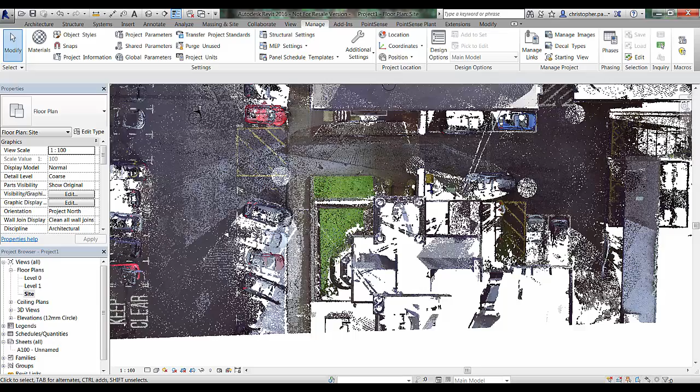The first thing I'm going to do now is find an area of interest. In this instance, in the 3D model here, we can see we've got this set of chimneys, which we'll probably have to model as a unique family, and that will save modeling time. So I'm going to go to the site level, zoom in on the area, and create a section directly next to the area I want to model.

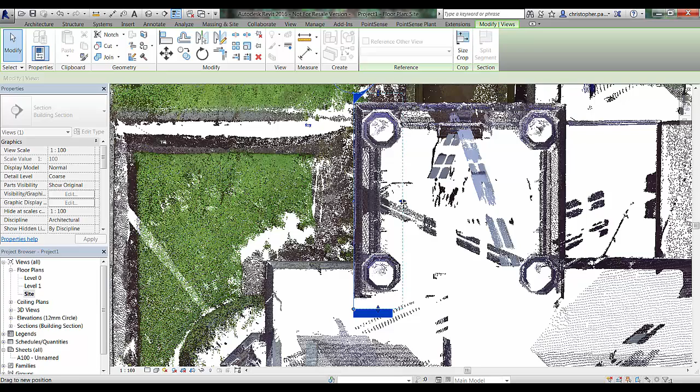I'm just going to change the extent of that section view to limit it, and open that up as an orthographic flat image. We can change the extent of the clipping area, drag these down, and zoom in to see what we have.

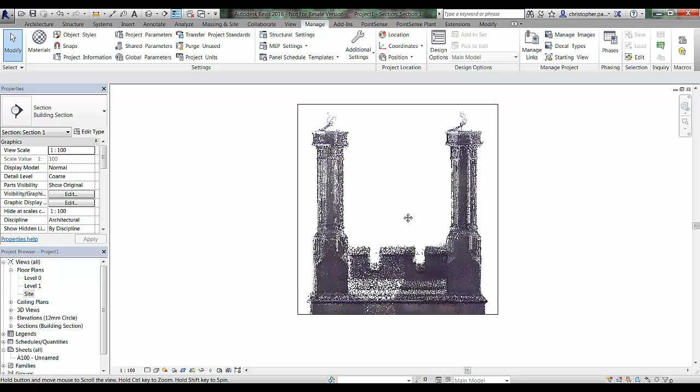Before I do anything, I'm going to go to the PointSense toolbar and go to my settings to have a look at what I've got predefined for the orthographic image. For the intensity factor here, I've got a setting of 1, and I'm going to change that to about 1000 and apply that, OK.

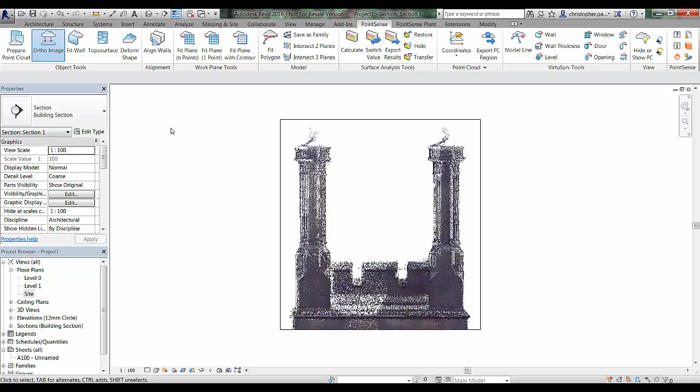The next step is to go into the Ortho image tool. You can see that's updated the X-ray intensity factor to 1000. Now we have to set a pixel size for our Ortho image - the predefined is 1, I'm going to put that at 2. We can then choose between colour filling mode or X-ray mode, but I'm just going to run this colour filling mode first and press start.

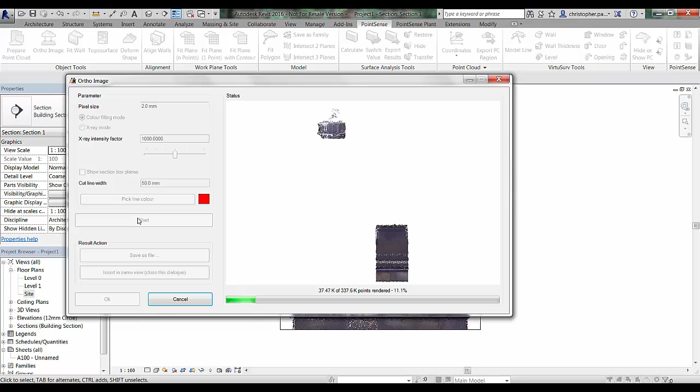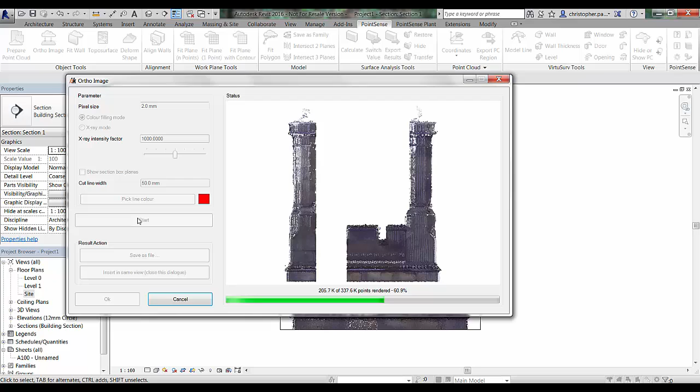First of all, you can see we are generating a raster image based on the extent of that section that we created, and this will take a little bit of time. Once we've done that we can choose whether or not to save this out as a file or insert it back into the specific section view. This will only work with section views or plan views.

If you use a 3D view, you can only save this out as a file. So once that's finished, I'm going to click on Insert in Same View, close this dialog.

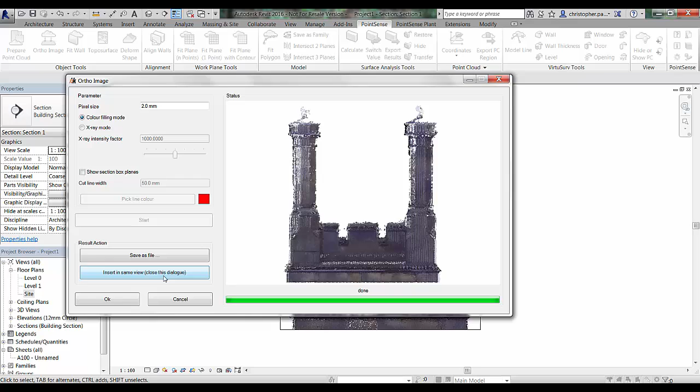That's just going to load that raster image into the current view. If I hide off the point cloud, you can see there's a tiled raster image being created in that area. And if we zoom in on that, you can see it's filled the gaps between the point spacings to create a flat image.

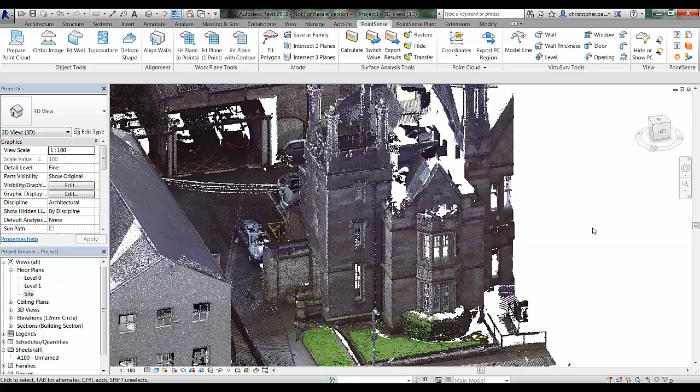If I orientate to section 1 in the 3D view, we can open up the same section in 3D, and run this Ortho image tool again. This time I'm going to use the X-ray mode. I already changed the X-ray intensity factor to 1000, and I'm just going to press start on this.

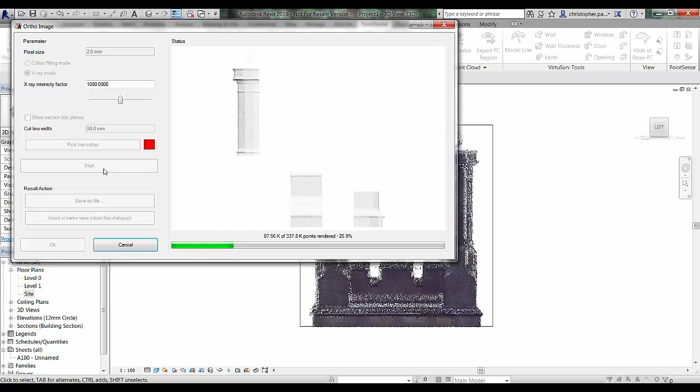You can see now it's gradually generating this grayscale image, and if I drag the intensity factor left and right, it slightly changes the visibility or the density of the actual image itself.

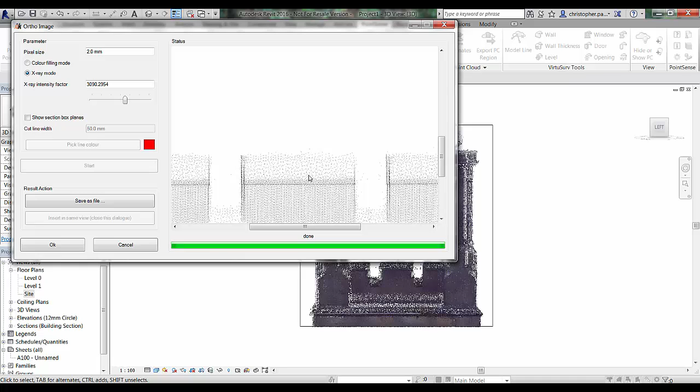So you can see that there now. We can only save this out as a file now because we're in 3D mode. So I will save this out, and we can show section boxes if we want to and change the colour, show the extent of that section box in black lines if we wanted to do that, and save that out as a file.

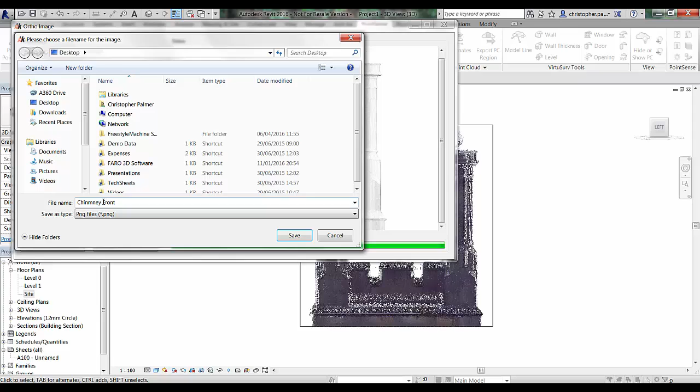I'm going to save this out as a PNG file. This will also save out an XML file, a scale file, which we will use to bring into the family template. I'm just going to click OK here.

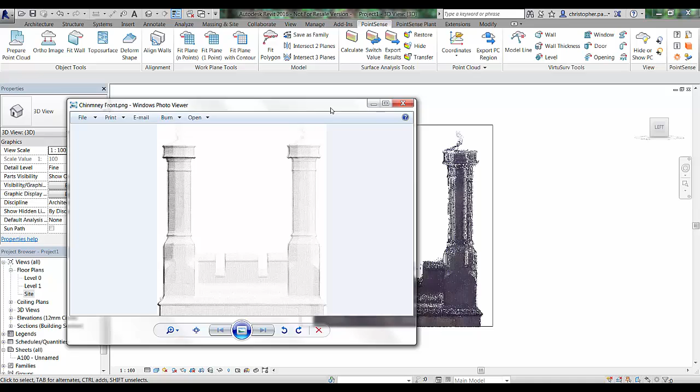What I can also do now, if I want to open that up and have a look, we can compare the two images. Here's the PNG file compared to what we have inside Revit. You can see it makes it a little bit clearer as to where the edges are of the chimney construction.

If I orientate the 3D view round to the side, possibly it would be best to do the top first or a plan view. We can zoom in again on here, go back to Ortho image, and run using the same settings we did before, which was about 1000, I think it was we set it at, and just press start.

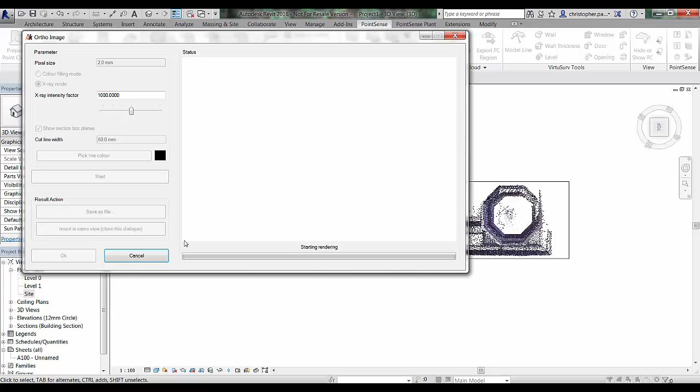These are fairly small areas, so they'll run fairly quickly. But you can see we've generated a plan view. So we're just going to save this one out as a file as well. We'll call this one chimney plan.

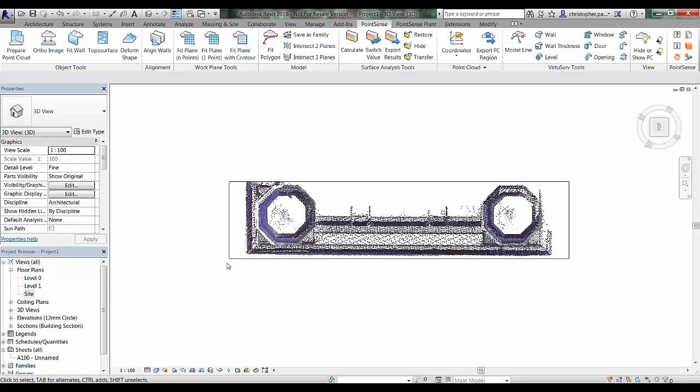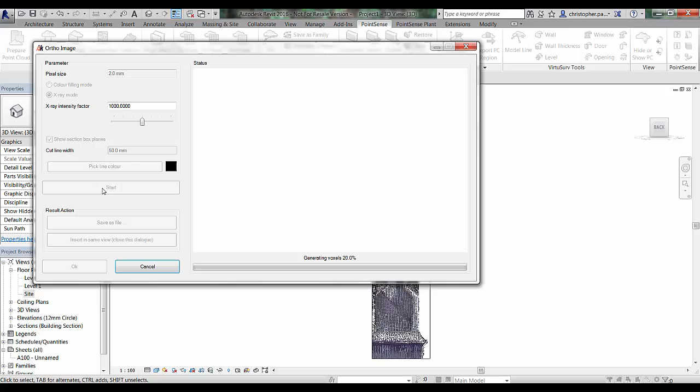Then last of all, we will generate a side view. So I'm just going to change the extent of the section box slightly, just to highlight that side area, and navigate around. I'm then going to run that Ortho image tool one more time, which should be relatively quick now. And there we will generate a nice side orthographic image.

Save this one out as chimney side. Click OK.

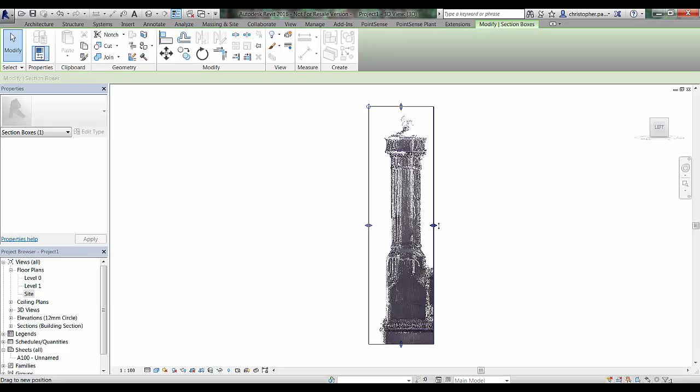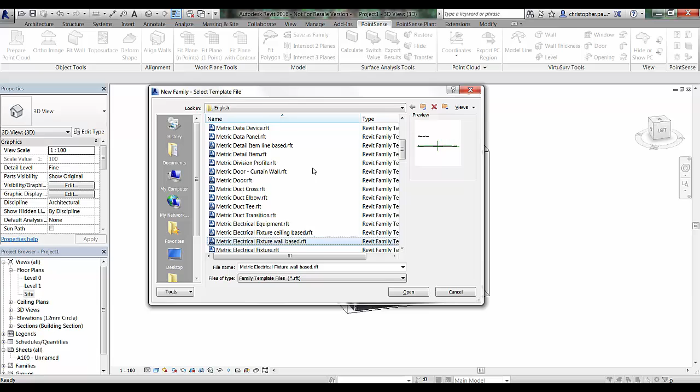And the next step will be to bring these into a family template and align them. So I'm just going to go now and open up a new family template. So we have a look down the list here. Probably the best option here would be to load in a metric generic model template, just so we can show the possible options that we have. So I'm just going to go to that now and open up that template.

Now you will see at the top now we have a PointSense tab with some additional options inside this family template environment, and we have one here called Insert Ortho Image. So I'm just going to click on this, and you can see what is shown now is the XML scale file, which is used to scale the PNG files. So we directly open those up individually.

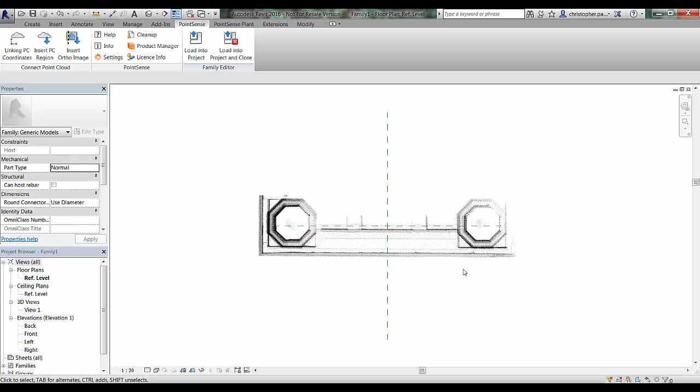So I'm just bringing in the Ortho, the plan Ortho image now, and we can see how this fits on the center of the reference planes. So when we're working with a small section box to create Ortho images, generally these will be aligned correctly when we bring them in, or relatively correctly in terms of the X and Y.

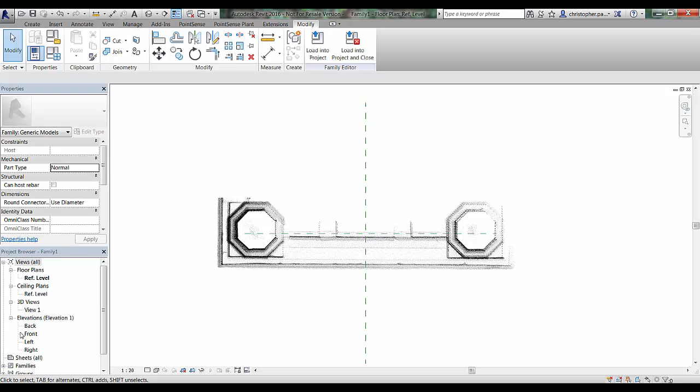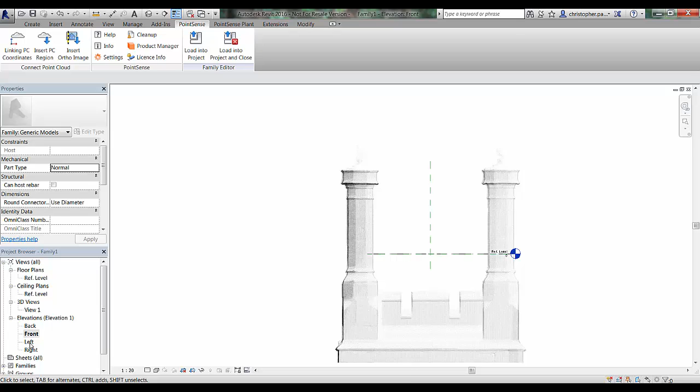So if I just go to front now, and then double click to zoom extent, go back to the PointSense tab and insert Ortho image, I'll just now bring in the chimney front XML scale file. So you can see there that's brought that in. Just go to the left hand side view and we will bring in the chimney side scale file.

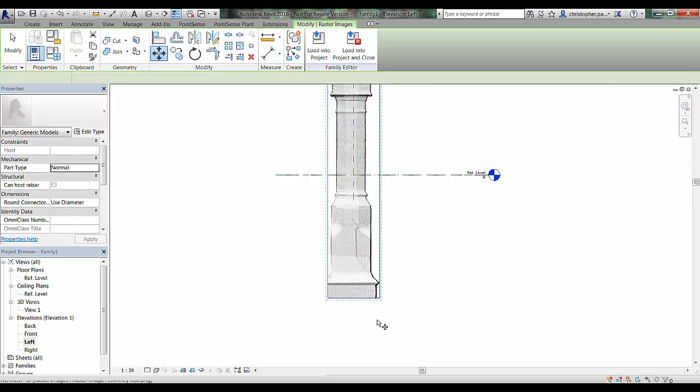There we go. So generally these are all in a relatively correct position, however obviously we want to put these all on the same position on the Z axis. So if we just select the bottom of this scale file now and bring that up to the 0 reference level, and we can do the same with the front elevation. So just select that there now and bring that up.

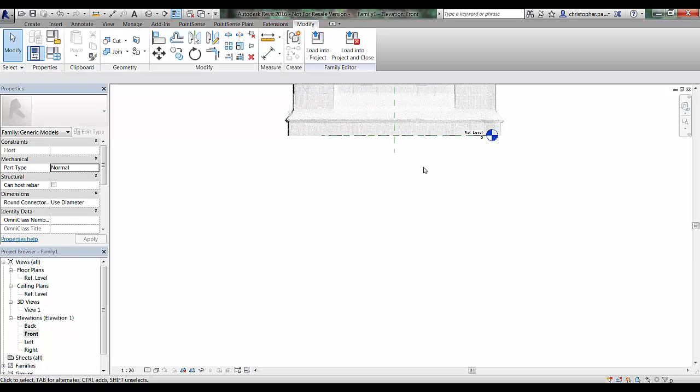Okay, so once we've got these aligned in the Z reference, we can create some reference planes to try and establish whether or not these line up in the different elevation views and also in the plan view. So I'm just going to find a nice area that I can pick to align these orthographic images with.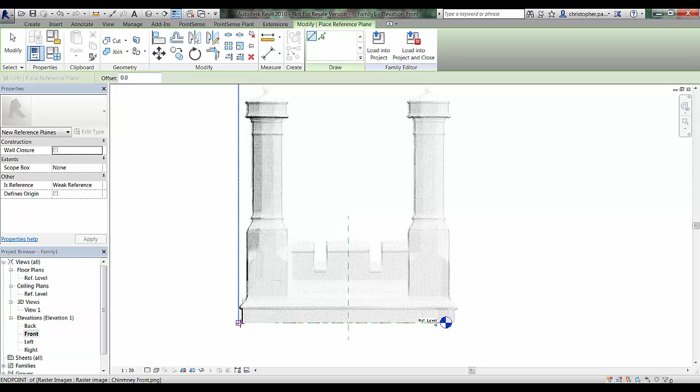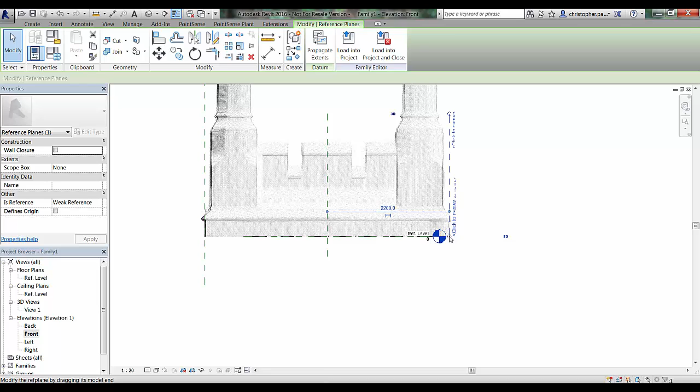So I'm just going to pick the extremity of the left and right hand side of this front view, or the outside face of the chimney structure itself, and create a reference plane there on either side, which will carry through into the plan view, and I can make sure that I've got that aligned correctly. So just 2 reference planes here. We also obviously have the center reference plane, which was already established by the family template itself. Just extend that one up, and we can go through now and look at that in the plan view.

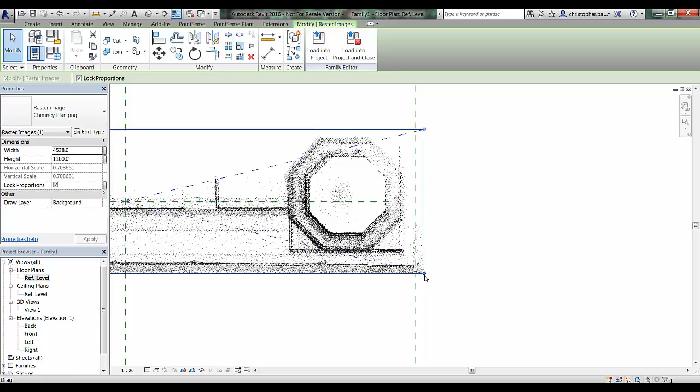So if we just zoom in to make sure this is aligned correctly. Now, like I say, because we did use a 3D section box in the project to create these images, these should be aligned correctly.

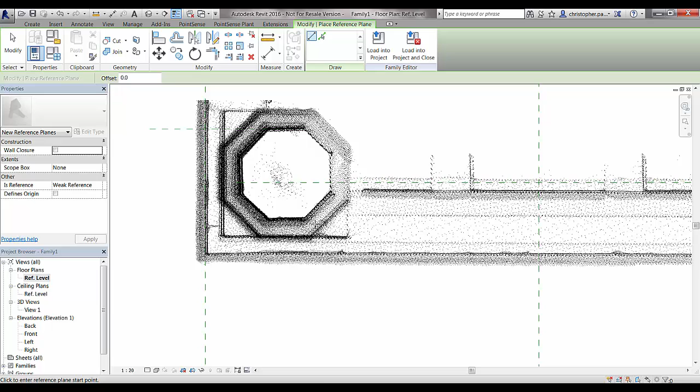If we just check this center line here, obviously it's not quite in the center of the chimney itself. So I'm just going to create 2 extra reference planes just to check that it is the outside structure of the chimney itself that is lining up. So if we just check that there, yes, if we just look on the left hand side, that seems to line up okay. So I'm quite confident that any modelling I do now will be displayed correctly in each of the different views.

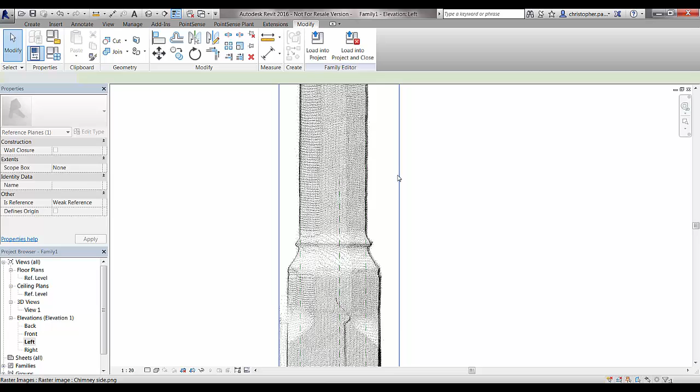So we just maybe go now and tile these windows. I'll just shut down the other project windows I've got open. We can have a look at what we've got.

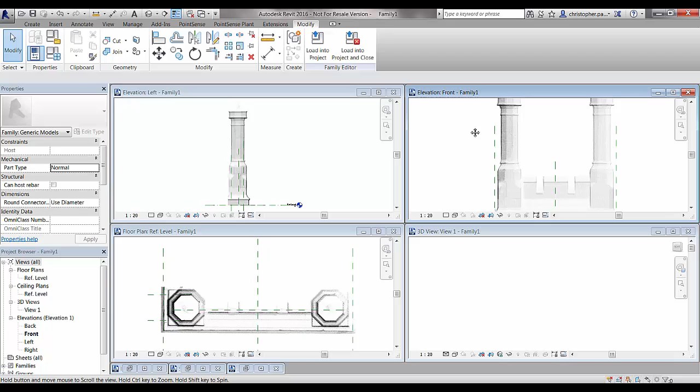Now you'll notice down on the right hand side there I've got the 3D view. The 3D view does not obviously have anything within it at this moment in time because we are dealing with 2D orthographic plans. However, the next step will be to populate this area using some points.

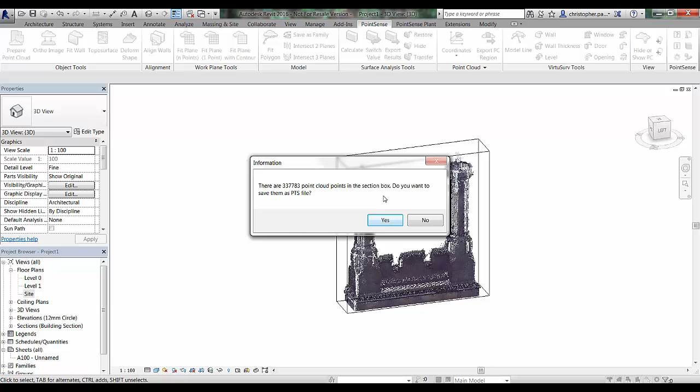Okay, so now I'm going to use the Export PC Region tool in the PointSense tab to export the active section box, which will produce a PTS file that I'll save on my desktop and call Chimney Points File.

Once we've done this, we can go back and open up our family template that we were working on previously, and have a look at how this displays in here. Obviously this 3D view is empty at the minute.

So if we go back to the PointSense tab and go Insert PC Region, open up our chimney points file and press open, we can change the scale unit, which is predefined to meters. We can subsample this data set down to every second point, etc, if we want to, and we can also bring that in origin to origin, or change the insert center point.

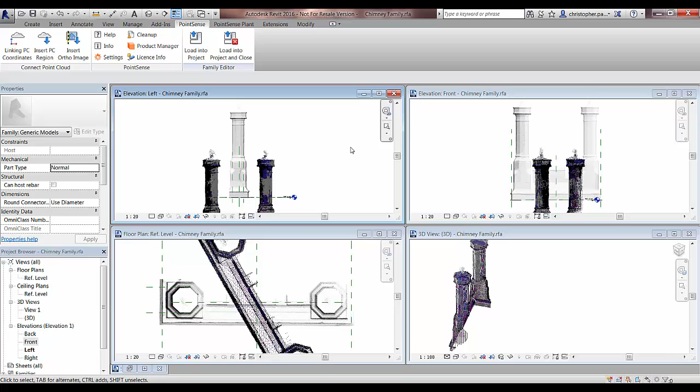So I'm just pressing origin to origin and inserting that there, and you can see it's come into the template, displaying in all the different views, and in the 3D view now you can see the type of quality of file that we're receiving. What I need to do, before I can use this in any way, is line this up with my orthographic images.

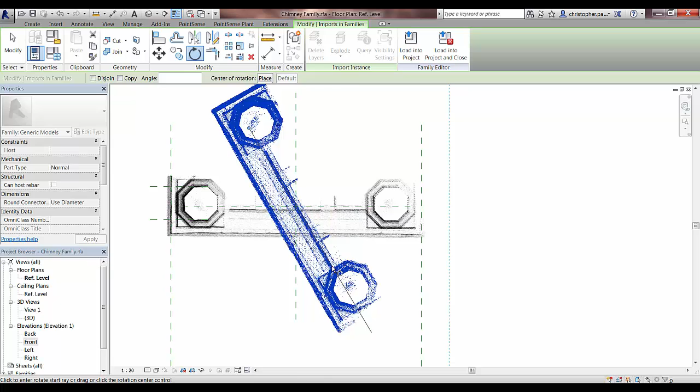However, I'm really just going to use this for a reference in the 3D view. So what I'm going to do is just rotate this around. It's probably best if I just place my rotation point in a specific location where I can align it up quite well.

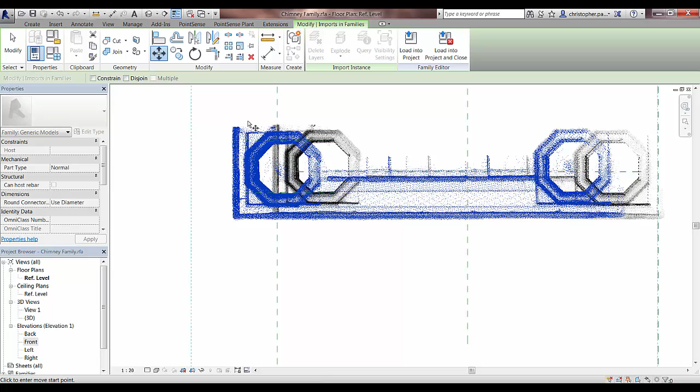However, this is just going to be for visual alignment, so I can have a look at what I'm modelling in the 3D view. So I'll just rotate that around now, and move this in the plan view across to match my orthographic image. So I'll just put that there, and we can now just go and hide that off.

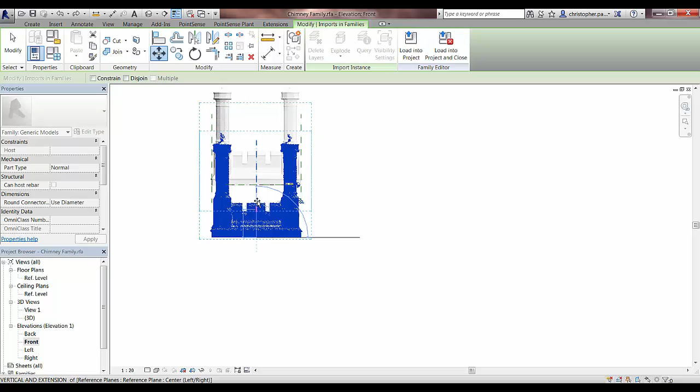Okay, so I've just tiled the windows again. The first thing we need to do now is rectify this Z value for the points file. So I'm just going to select that once and drag it up to the reference zero level, which will update it in all of the different views. Now we can see we've got this fairly well aligned.

However, we are just going to be using this as a reference in the 3D view, so we don't really want to be using it in the elevation and reference level view. We're going to use our nice clean orthographic images instead.

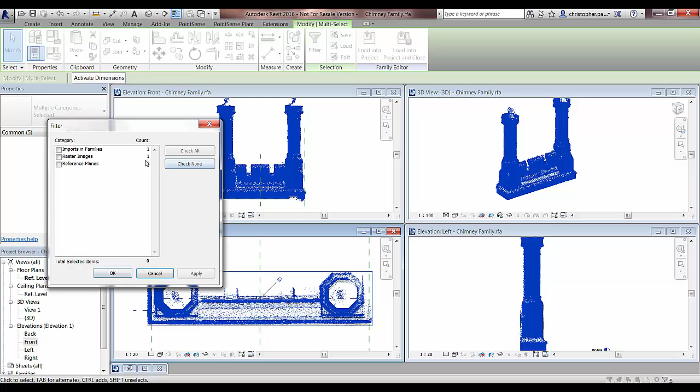So I'm just selecting all of the elements there. I'm just going to filter my selection down to focus on that points file itself, and I'm going to hide that off. I'm going to do that in each of these different views.

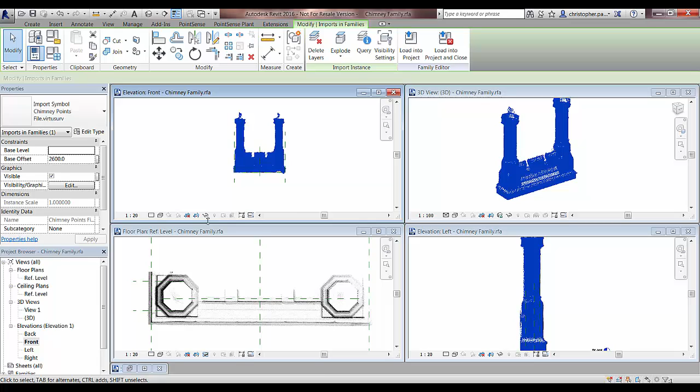It would probably be a good idea to pin some of these orthographic views first so that we didn't select them all, so that they weren't selectable. So we'll do that next. But for now I'm just going to hide each one of these off, using the temporarily hide elements command. Just do my last one here, filter that down and hide off the imported section.

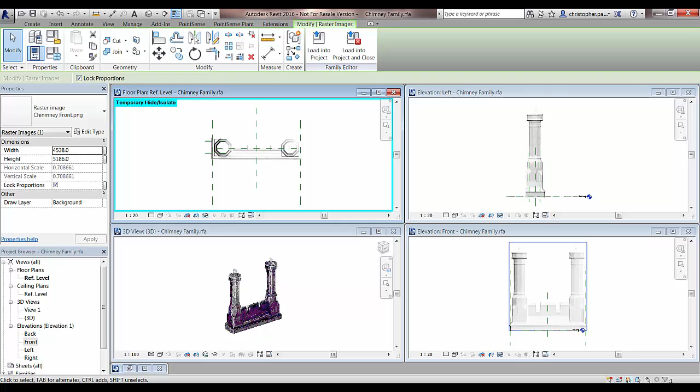Okay, so now we can start to look at doing some modelling as well. We've got this plan here now. If I just first select this orthographic image, I'll pin that one there, pin the left elevation and also pin this front elevation, and turn off my select pinned elements command so that I can no longer select that orthographic image.

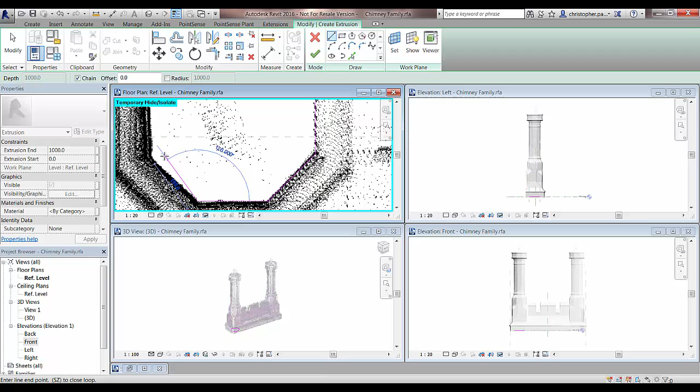So we'll just zoom in now, go to my Create and Extrusion tab, and we'll just draw a rough extrusion around the shape of this chimney itself. There we are, just draw this in. Now we should be able to see this appear in all of our different views. So I'll just close that one off now.

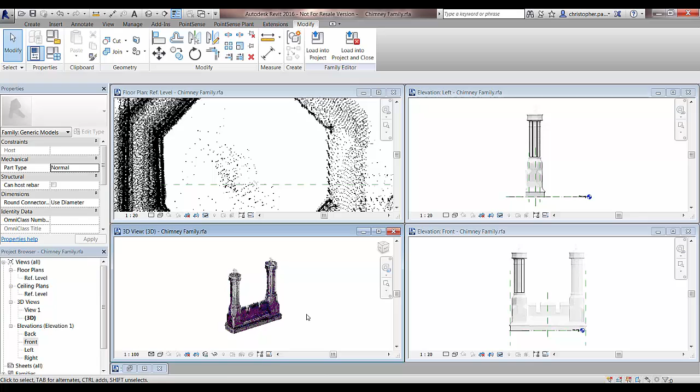Just go and press the big green tick for OK. Now we can see that that's appeared in the correct position in each of our different views, so I can just drag that up to roughly where it should be. And if I now maximise this 3D window, we can see that's appeared in the correct location. There we go.

So there's the shape of our chimney structure itself. Really this is just a nice way to get some clean images into the template to use as modelling guides.